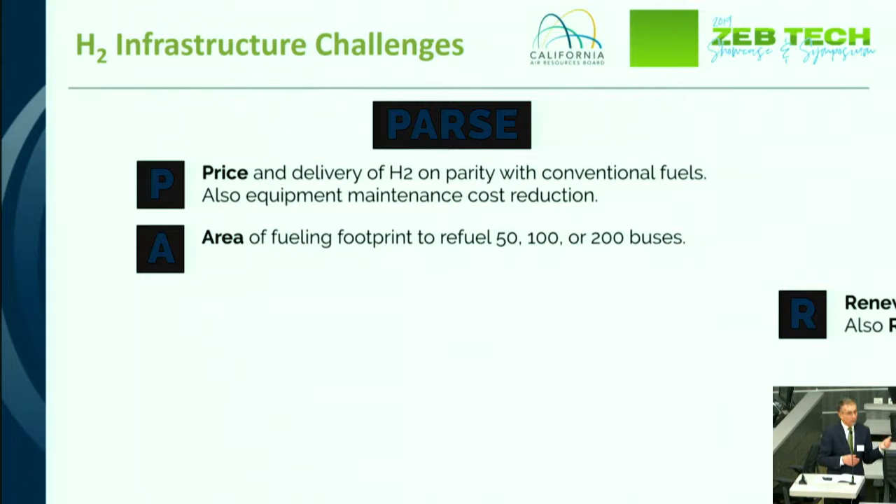R is for redundancy, resiliency. What do we do for backup? We live in a seismically sensitive state, and now we're also facing wildfires that are curtailing grid power. So we need to be able to address resiliency. This is not a small issue.

The other aspect of R that's important is renewable. How are we ultimately going to source renewable hydrogen in order to meet the state's goals? Our panel today will address that.

S, which is the next one, is the speed of fueling. If you look at how we operate within a very tight, maybe 5 to 7 hour window to refuel vehicles and then get them back out on the street, that is the simplest approach to a large fleet operation. So speed of fueling is a very critical aspect of this.

And then the last one is the equity, the actual cost of entering the technology, building stations. Bill Zobel from Trillium earlier had shown a graph of the steep startup costs to install hydrogen infrastructure. But as you expand and scale up the fleet, that's a whole different set of economies of scale.

With that, our panel: we have Chris Kretz from Air Products, one of the largest hydrogen suppliers internationally, building the largest hydrogen fueling station at Orange County Transportation Authority with Trillium. We have Ryan Erickson with Trillium, one of the largest suppliers of alternative fuels for fleets, buses and trucks. And then we have Pierre-Germain, PG as we call him, with Air Liquide, another large supplier of hydrogen for transportation applications internationally. And lastly, we have Arnab Chatterjee with Shell Oil. Shell is the largest fuel retailer in the world. So with that, we'll begin with Chris.

Good afternoon, everyone. My name is Chris Kretz, and I do business development for Air Products, selling hydrogen fuel and hydrogen fueling stations to a variety of fleet managers, transit agencies, OEMs. I'm going to talk to you today a little bit about cost of hydrogen. I know it's a bit of a sensitive subject, but we are in a position to talk about the factors that affect cost.

I've listed here some of the factors that affect hydrogen cost. These are by no means all of them, but they're some of the key ones that will influence the cost to produce it and then the price you might see at the pump or at your transit agency.

First of all, project scale. I know we talked a little bit this morning about a very large fleet, but you have to start somewhere with a demonstration project for a bus. There are a number of choices you can make, and I'll talk a little bit more about that on the next slide.

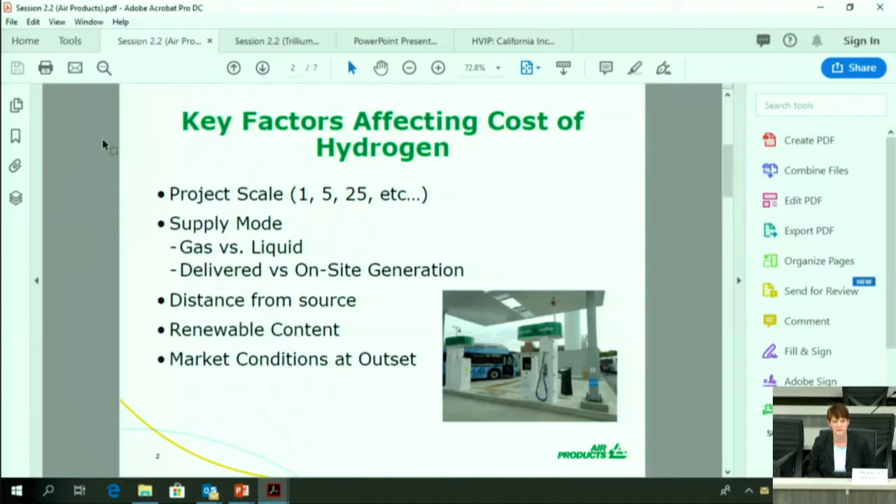Some other factors that influence cost are supply mode. Unlike CNG, for example, or diesel, there are some options with hydrogen: gaseous or liquid hydrogen. Do you want to have it delivered to site? Do you want to make it on site through a couple different mechanisms? Those are all choices you would have as a transit agency. Companies like Air Products, Trillium, Air Liquide, and Shell are here to help you address these questions and figure out what's the right solution for you.

Distance from source, that is the distance between your depot and the hydrogen source site, renewable content, and market conditions. So those are kind of the high-level factors that we see influencing cost.

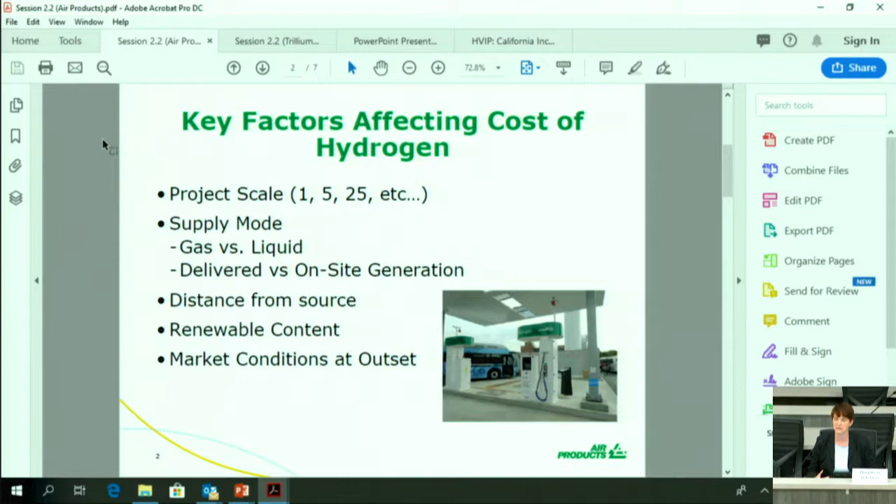For example, just to give an example of a 1 to 2 bus demonstration, you could have a temporary fueling solution, like a mobile fueler. In terms of convenience, having a mobile fueler and a bus on your site is pretty easy, pretty straightforward, not much permitting, not much infrastructure, but it has limited capabilities.

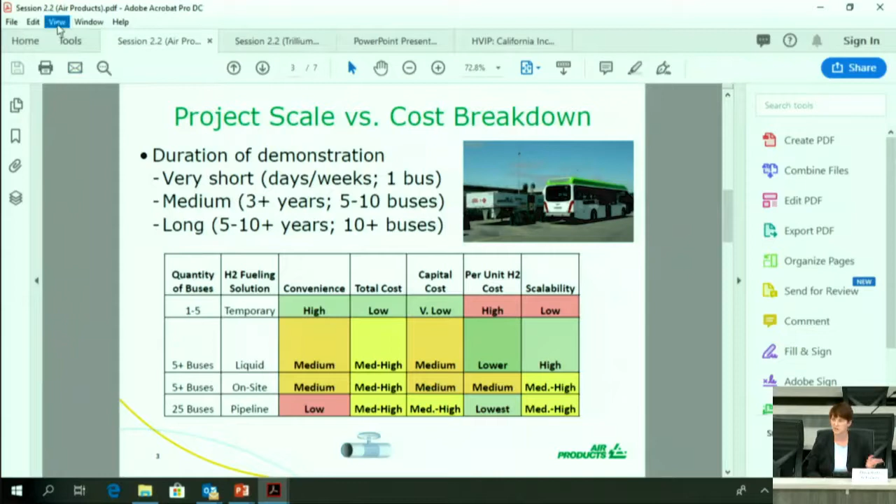But then if you look at per unit hydrogen cost, it will be quite high for a mobile fueler. That's because the whole solution is delivered to you in one package, shown in red. And if you look at scalability, that is also a very low scale type of solution. So not really something you'd want to use for scaling up, but something you could use to start out.

Then as you go down the chart, you look at 5+ buses, 25 buses down at the bottom, you see some other solutions. Second row is liquid provided, and it goes through and talks about the convenience factor of liquid, the total cost and capital cost. The beauty of a liquid hydrogen solution is that it's very scalable.

We'll talk tomorrow a little bit about the OCTA fueling station we're doing in conjunction with OCTA and Trillium. While that's designed for 10 buses, it can also be used for 25 and 50 buses without significant modification. Then you can go much larger to 75 or 100 buses by just building slightly on it, not having to totally replicate the solution.

So this chart gives you an idea for temporary fueling, liquid fueling, on-site generation of hydrogen, and then pipeline, which is another option available if you are near a hydrogen pipeline, such as what we have in Southern California. It compares and contrasts the advantages and disadvantages of the different supply solutions.

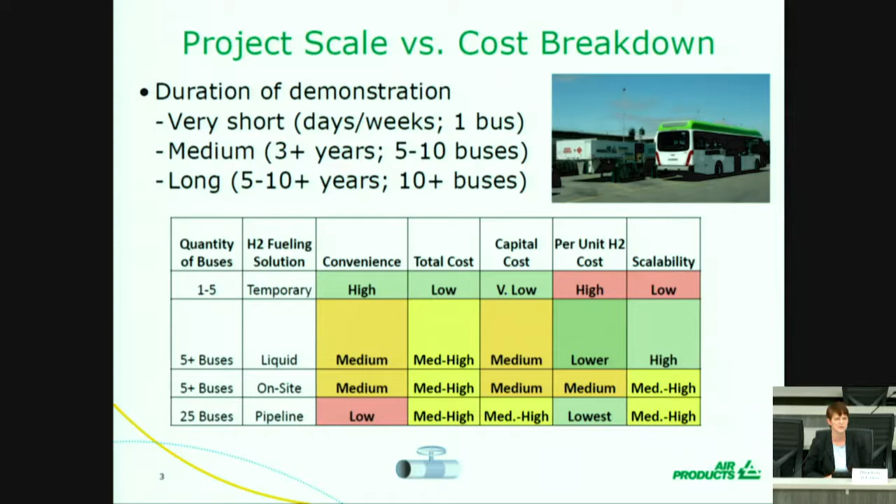I don't intend to go through every single one of these in detail, but if anyone wishes to talk with me further, or any of the folks on this panel, I'm sure they'd be happy to do it, because there's trade-offs for each of these solutions.

So I've talked about project scale. You need to think about distance from source. Where is the nearest hydrogen? If there's not any hydrogen nearby, can you generate on site? And what does that mean? Those are discussions you can have with any of the providers here and others to try and understand what is the best solution for me.

But each solution will have a cost impact to you, both from a capital and from an operating cost. So you need to work through that with your providers and figure out what makes the most sense for you. Factors like footprint and scalability also come into play as well.

And if you want to talk about renewables, I know in some earlier sessions we've talked about renewables, and it was stated that SMR hydrogen isn't renewable. Well, that's not exactly the case. SMR hydrogen today is one of the cheapest ways, if not the cheapest way to make hydrogen. And you can make it renewable by introducing biogas into the mix of supply along with natural gas.

So that is a factor that affects costs. If you want or need it to be renewable, that will, in today's market, could increase your price, but then you have to factor in other things such as credits, such as the low carbon fuel standard, and weigh that against what might be the added cost to make the hydrogen from renewable biogas.

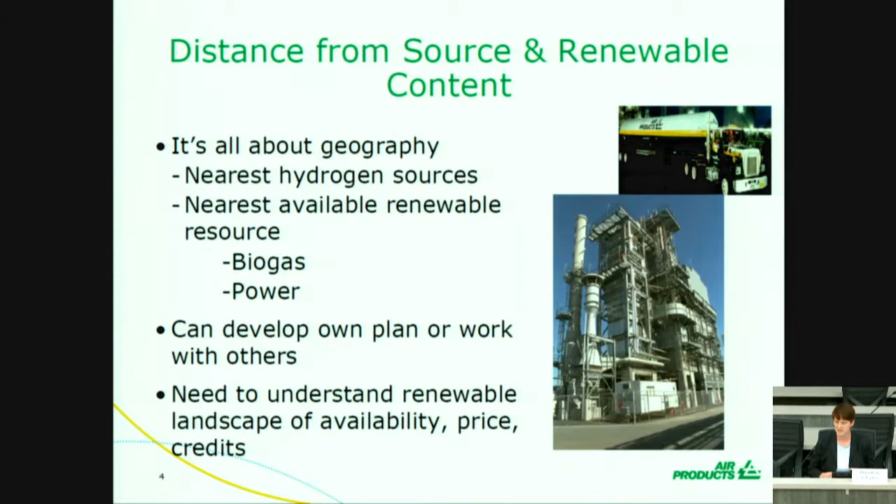These things can all be discussed with providers, and we can walk you through options and how to balance the costs. But it's important to understand some of these factors, such as scalability, distance from source, and whether renewables needs to be part of the mix.

And then finally, market conditions really play a role in hydrogen cost at this point. Good, bad, or indifferent, that is the way it is. Right now, the market in California is predominantly for automotive, and cars drive the market in California today, but I've also put some trucks up on this slide to show you there are other markets using fuel cells that could potentially affect the cost, drive the cost down by bringing scale of usage and scale of supply to this market.

And then additionally, some others have mentioned contract terms, certainly longer term contracts. You can get a more favorable price, and then credits as well.

And then finally, I'd like to leave you with this slide, which just talks about footprint versus scalability. Those are factors that will also influence cost. So if you have a very tight footprint, you need to think about what solution you might need, and then think about how you might want to scale up and whether your site has the ability to meet the demands of your growing fleet.

There are some solutions that are more versatile than others in terms of scalability, and these are some factors we are happy to talk to you about. I thank you for your time.

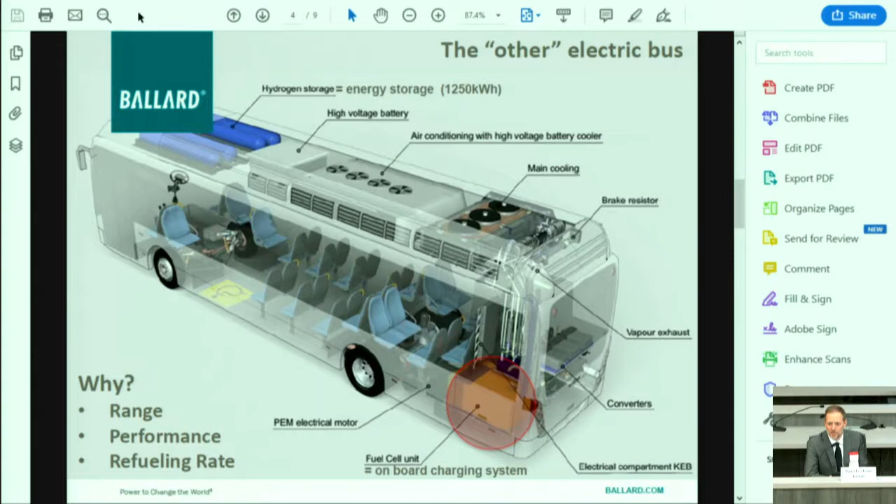This is a zero-emission bus. I like this picture from Ballard, so I've copied it here. Basically, it's the same electric bus that you would get with a battery electric bus, except that the battery is decreased in size, and then you put in the fuel storage and that battery recharger, the fuel cell, which is a zero-emission fuel, battery recharger on board. So it is an electric bus. It still has zero emissions, and has the same potential for low carbon as well.

Dealing with the price of hydrogen, our goal, and I think everybody's goal here really, is to provide fuel at $5 or less per kilogram, and that number I kind of view as the magic bogey because of what you're used to paying for diesel fuel today. Because of the fuel economy advantages of a fuel cell electric bus versus a diesel or CNG bus with an internal combustion engine, $5 per kilogram hydrogen is roughly the same as $2.50 to $3 of diesel. So this would give you the same cost per mile for your fuel cost if you can get hydrogen below $5, and we believe that's very possible. Chris did a great job of already discussing quite a bit of that.

It really comes down to where you're located, what your opportunities are, how much space you might have on site to do on-site generation versus hauling in fuel, and then the low carbon fuel standard, I think, is going to help a great deal in that as well.

Just an example of how fuel is made, how hydrogen fuel is made. One method is steam methane reforming, or SMR. It uses natural gas to produce the fuel, along with a little bit of electricity and water. The energy cost for the natural gas, the primary energy source there, amounts to about $1.20 per kilogram. So you can produce very low-cost hydrogen with steam methane reforming.

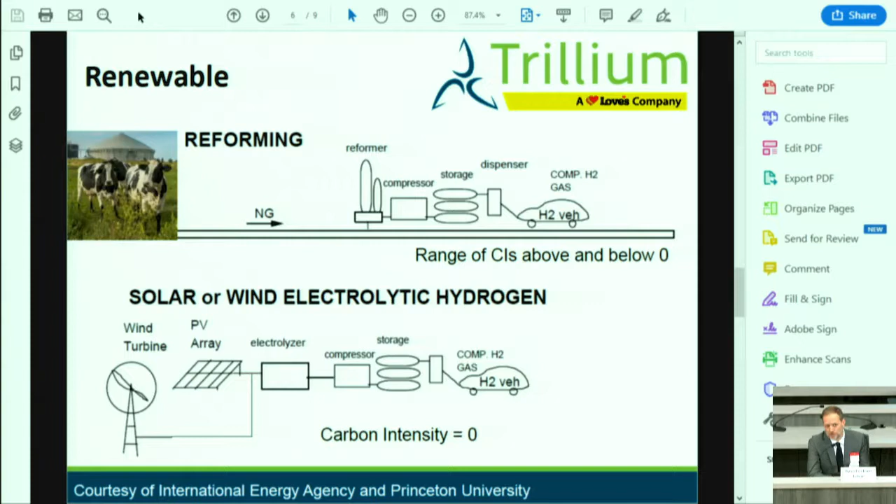Why this is important is, number one, to try to reduce your carbon footprint, but also with the low carbon fuel standard that CARB has, it's the value to you. So if you can get a contract with Air Products or Air Liquide or anybody for hydrogen, today that hydrogen cost might be, for liquid hydrogen, something like at OCTA, I think they're paying right around $8 a kilogram.

But if that was hydrogen that was produced from dairy farm methane gas recovery through an SMR, well then you might have as much as, I'm showing here, about $6.50 in LCFS credit available to it. And that's based on even a price for an LCFS credit that's lower than it actually is today. So this is just an example - the LCFS credit value is pretty significant here.

I think it was Mark, from AVTA, who mentioned trying to get to a kind of net zero on fuel costs, and I think that same possibility is here with hydrogen. It's using the low carbon fuel standard to help get there.

One of the things also, we're trying to make sure that we provide a solution that isn't just good for you 3 years from now or 5 years from now, but 20 years from now. And so the low carbon fuel standard may not be around for 20 years. I'm not sure - I don't think anybody is at this point.

But one of the benefits that the low carbon fuel standard gives is it allows you to start developing these technologies and getting them up to scale, so that if 10 years from now the low carbon fuel standard were to go away, instead of a couple thousand kilograms going to the state of California, there's a couple hundred thousand kilograms of hydrogen going to the state of California, and all the costs that drop with that.

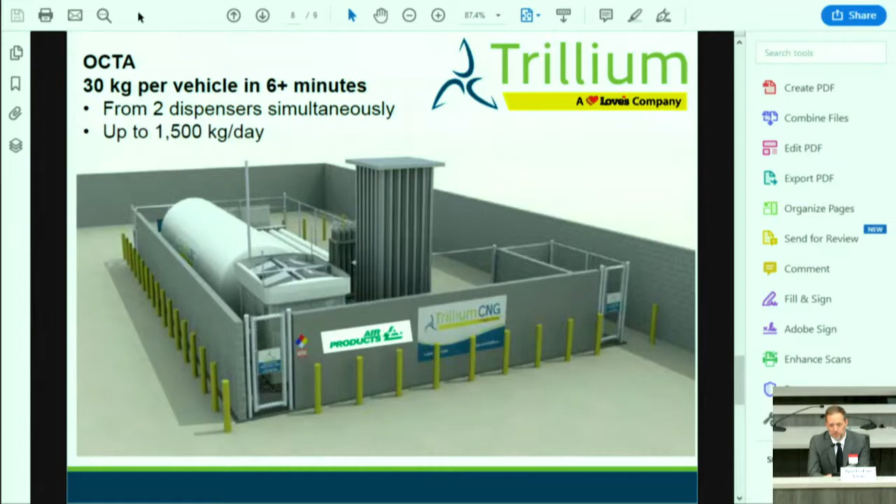So we came up with a solution that there are many vendors that could provide them a station that will be suitable for up to about 50 buses. And like Chris just said, we don't have to double the price to go up to 100 buses. We don't have to double the price again to go up to 200 buses. I think Bill Zobel mentioned it this morning - maybe it's a 30% increase in price to double the volume of that station. So there's a lot of scalability there if it's designed for that upfront, and that's what we did with OCTA, and that's certainly what we suggest for any other customer.

I think one of the bold things we've done is address a 50% reduction of CO2 by 2050. For those that have been talking about how to reduce carbon intensity, this is a really important clarion call for us, because our executive pay is now linked to CO2 reduction. So we are extremely motivated to get our oil and gas production, but also our new energies production—whether it's biofuels, hydrogen, electrons, or whatever else—down by 50%. This is extremely challenging.

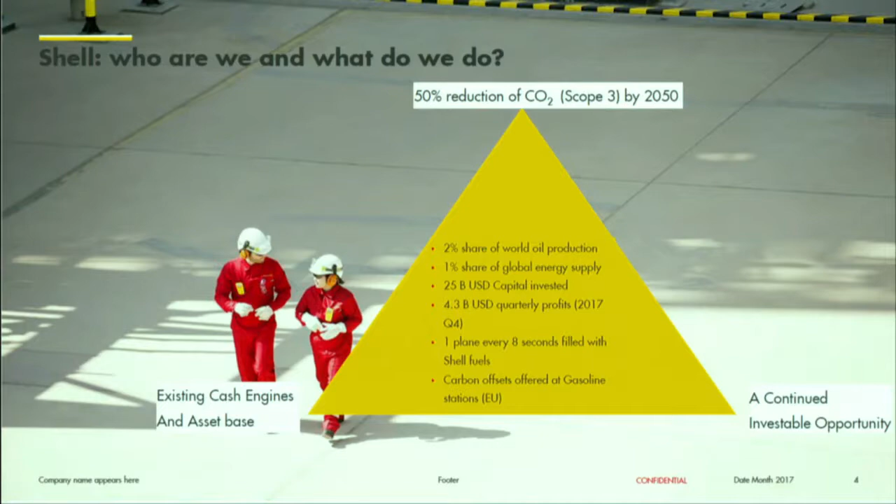I'll skip this, but I'll come back to it later if there are questions, because this is a scheme showing what we're doing in Europe, where today if you run Shell biofuels or whatever else in your bus fleets, you can actually offset some of your CO2 footprint by contributing to a nature-based partner to reforest or similar. That might be of interest to some of you in the audience.

What is new energies? Well, it's mainly new fuels, so the biofuels, hydrogen, electromobility narrative, as well as, on the other hand, the power side. I wanted to emphasize that because perhaps a number of folks may not realize the diversity of the work that we actually do.

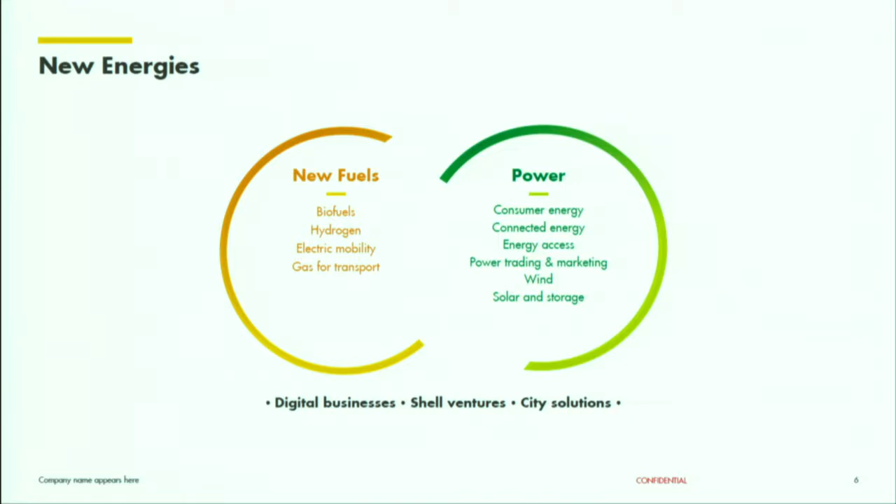One of the areas we are focused on is city solutions, and I personally look very closely at how we can work with LA and the ports in LA to make both zero emission and the CO2 footprint significantly lower in the next 5 years.

What do we see as the benefits around this? I think it's something that Emmanuel Macron talks about, how do we reconcile the views of people for whom the timescale is the end of the world versus those who think the timescale is the end of the month. I think hydrogen captures both of those. In the short run, we see air quality improvements as being critical in areas where today there is no other alternative.

And we can go through the maths at some point around what we need to believe for example, batteries and lithium, nickel, and other battery types to get to the kind of energy densities required.

In the longer run, what we see is that hydrogen can help reduce CO2 if it's made from renewable or low carbon resources. I think already Ryan spoke to biomethane, and I won't go into that in too much more detail, but we can certainly speak to that. The other area is, of course, natural gas at scale with carbon capture and storage.

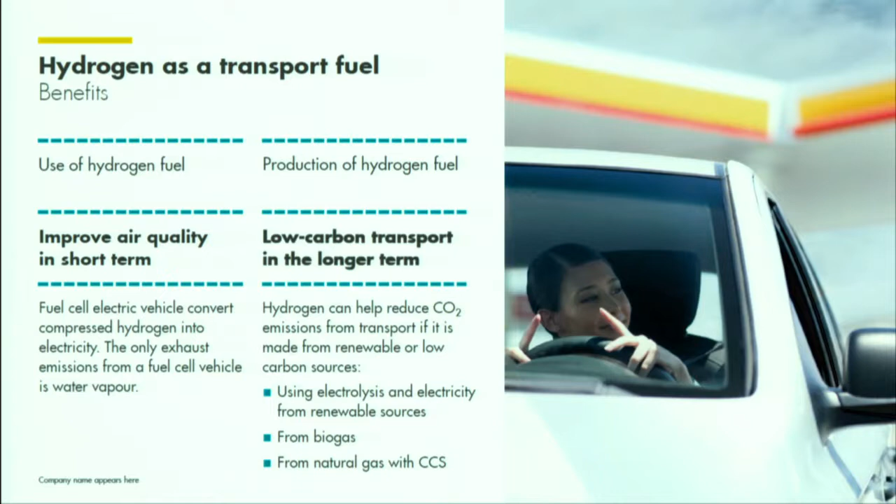So how can you convert that into something that is effective, clean, and useful? So we're working quite closely on thinking about how we can link our wind assets with things such as hydrogen mobility.

These are the three areas that we speak about: natural gas reforming, gasification with agricultural waste, and electrolysis. And we work in all three of these pathways. We either work with third parties or we build our own technology here.

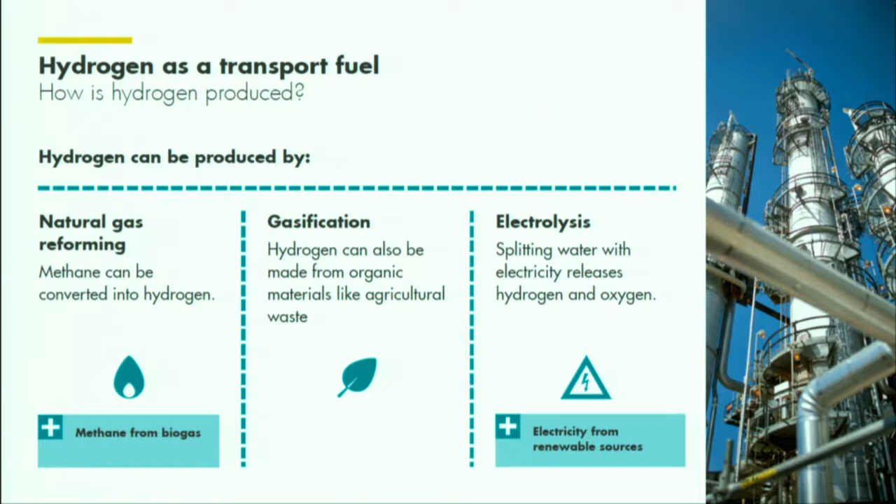The other area that we haven't spoken about today, and I won't bring it up too much, is grid balancing. So again, what we're seeing, particularly in certain markets in Europe, and we most probably will see that in Australia as well, is the surfeit or the production of power from renewables starts to destabilize grid.

And the only way to think about managing that is through either managed charging on the EV side and putting in stationary batteries, which is extremely challenging for reasons that we'll come to, or potentially by converting to hydrogen. So this is something that we're starting to work on, and we're developing projects in Australia and potentially in China with this regard.

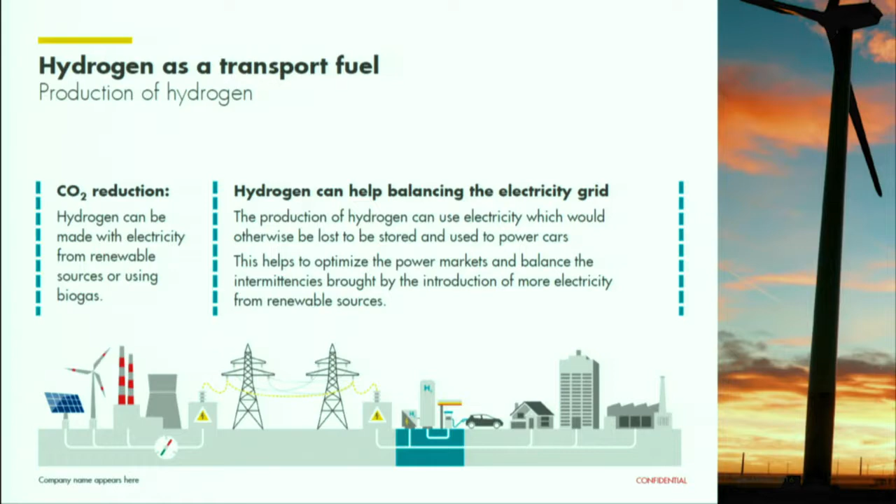We like hydrogen. It's easily stored. It has a high range. It is cost competitive, we believe, on a kilometer basis over 1 million miles or 7 years with diesel, and certainly on an environmental footprint pathway, depending on how you manufacture your hydrogen, can give you up to net negative CO2 footprint.

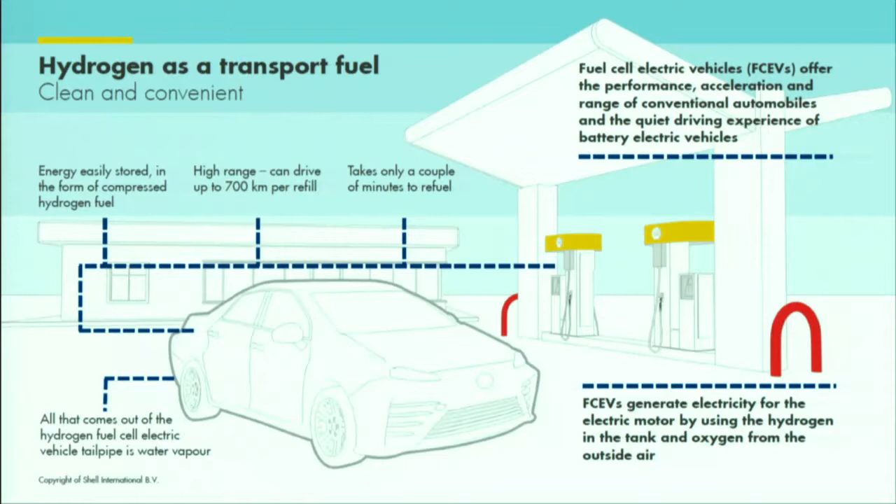I think we all know how it works, so I won't get into too much of the technical detail. This is some of the work that we're doing. As I said, we've got some stuff in California, in Germany, in the UK, and Canada.

And we truly believe that collaboration is the key to success, with H2 Mobility in Germany being, I think, one of those examples where we've worked, in fact, with Air Liquide and others to start to work through collaboration rather than competition at this early stage.

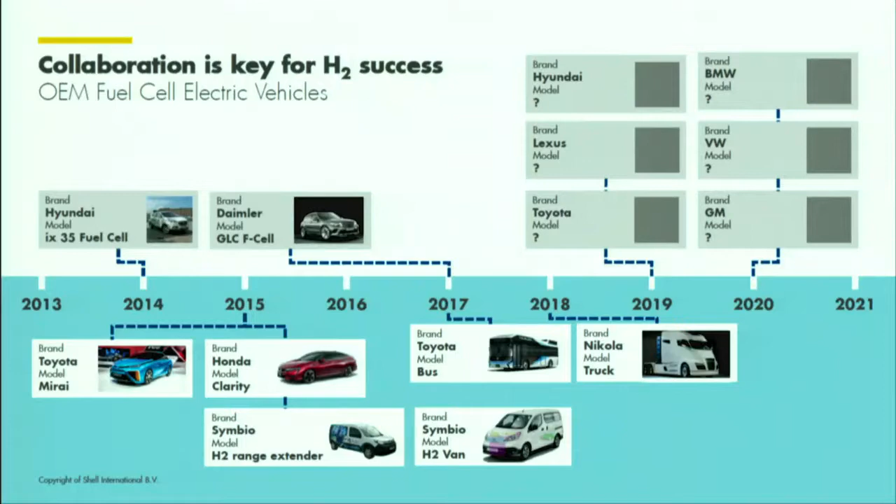I won't talk about the light-duty work today, but I think perhaps this is where we see the near future for hydrogen. So we're working on everything that's been mentioned, compressed H2 gas delivery, how do you get costs out of the supply chain? We think that's where we will see some of those costs to get down to the $5 per kilogram level. How do you improve your SMR footprint?

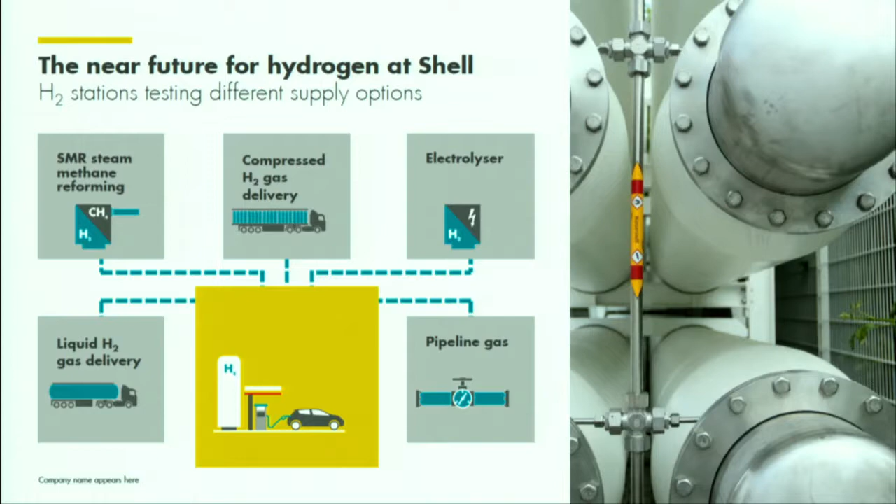So how can you do it distributed? And how do you then get to the scales that might be required when you have a 300 bus terminal and so on? And that's around liquid hydrogen.

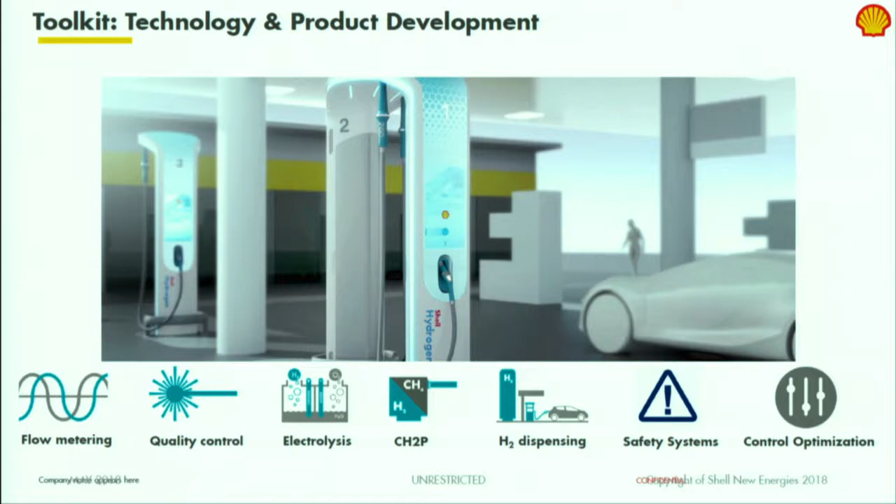What are the things that we play around with? Well, it's really improving control optimization, improving the hydrogen dispensing narrative. So how can you as operators really benefit from the user experience such that it is easy to use, it does not destabilize your current operational footprint, and it gives you the quality on a regular basis that you expect today with diesel.

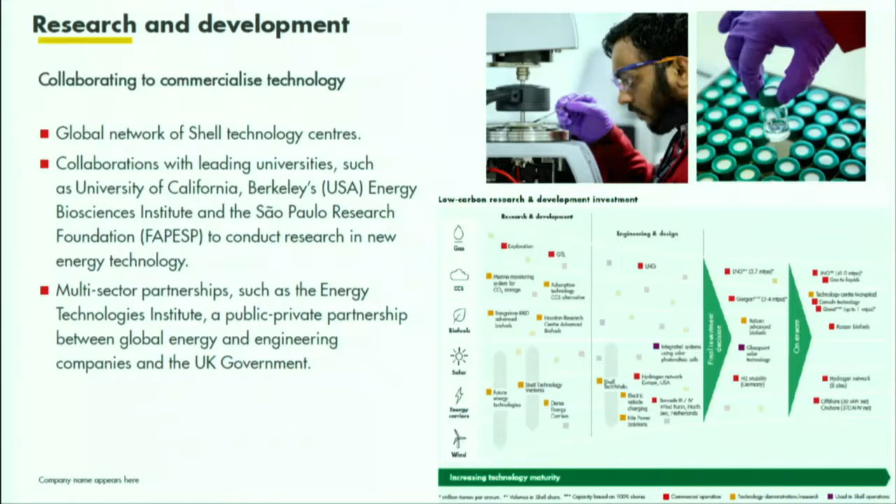We have a strong R&D arm, and we're working on various bits and pieces here in California as well, most notably with Berkeley. And again, happy to talk to anyone that's interested in the R&D sides of things later on. And I think it just goes to emphasize what we see here for hydrogen is not just a 5-year vision, but a 10 and 20-year vision.

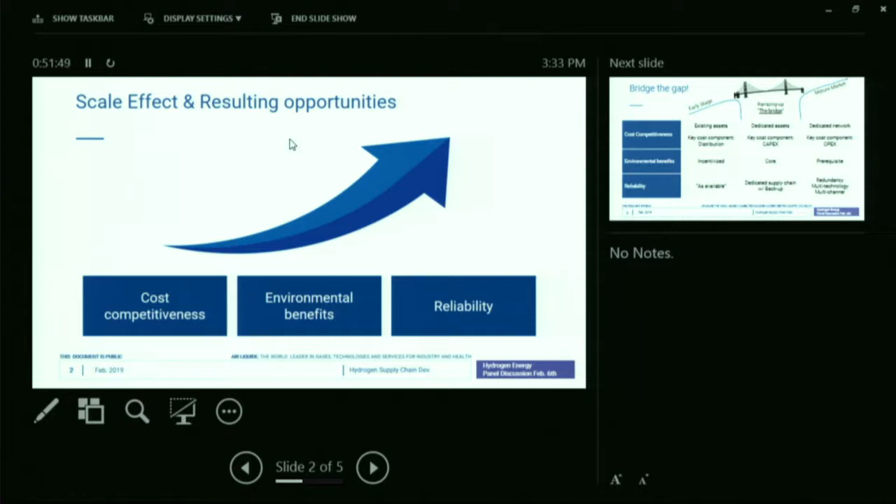So just to give you an overview of where we think the situation is right now: we have a supply chain model based on existing assets, where the key cost component of your delivered hydrogen is not hydrogen, it's distribution, where the environmental benefits of the fuel are incentivized, and where reliability is based on whether the fuel is available at one of these existing assets or not.

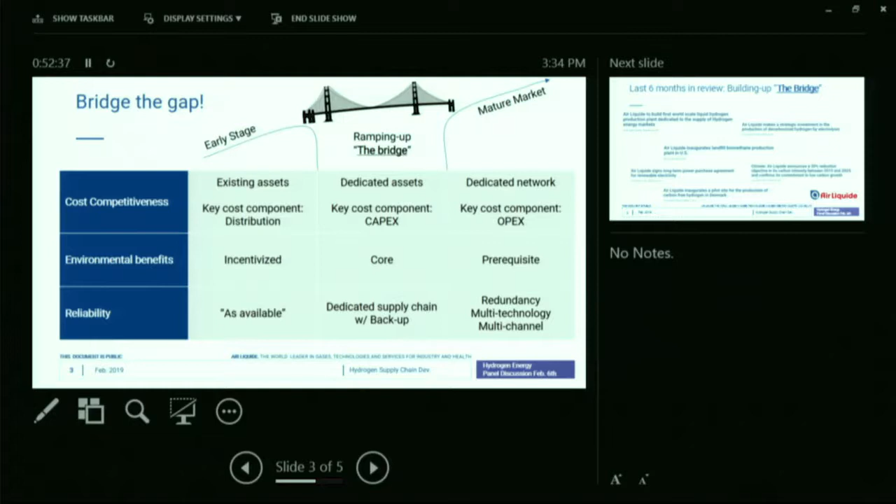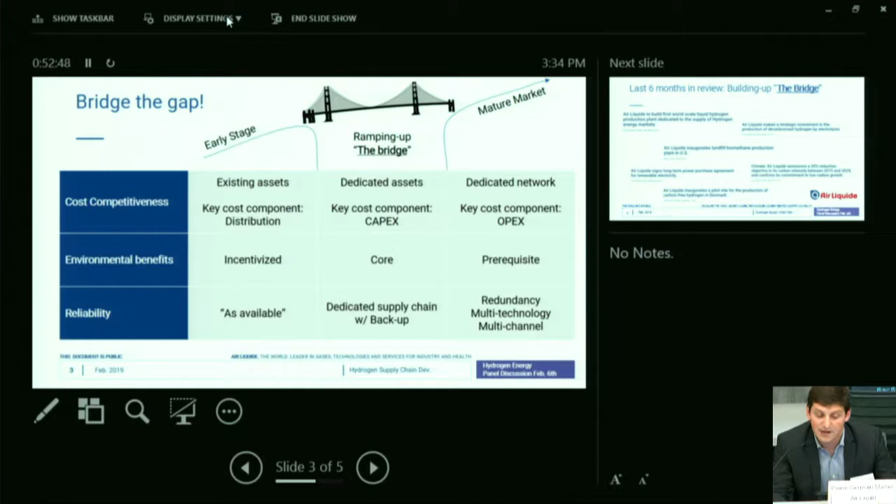The model we are about to move to is what we call the bridge. It's not yet a mature market, but it's no longer early stage. We're no longer talking about pilot projects or local development—we want to take it to the next level. This means having dedicated assets, strong investment at different stages of the value chain, putting the environment as the core value of these new developments, and making sure we have the dedicated supply chain and associated backup to preserve reliability while we develop that.

So how do we do that? Here are a couple of examples of what we've been doing during the last six months to build this bridge. We're not alone in this—the whole industry is doing this. We're building a new production unit for the West Coast, and we just announced we took a stake in one of the major electrolyzer manufacturers. We've also ramped up our biogas production in the US, announced very promising carbon reduction targets at the scale of the entire group, and started a pilot plant in Denmark using wind electricity and electrolysis.

So really, our message is we are no longer trying to figure out how we do it—we are already building the future and making sure it's a reliable and competitive source of energy for transportation. Thank you.

So, as I was addressing the last question, and I think it's very relevant, the challenge for transit operators is there are many issues regarding the actual station and what works best for each agency at their particular depots in terms of delivery of the molecule. But the bottom line is that transit agencies have to deal with what it's going to cost out of pocket. It may be doable for a small fleet to handle a significant incremental cost up front, but they're now facing a 20-year time period through regulation to convert their entire fleets.